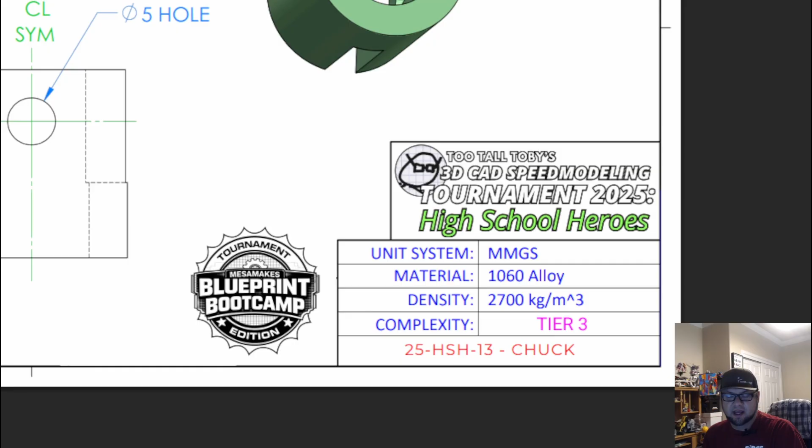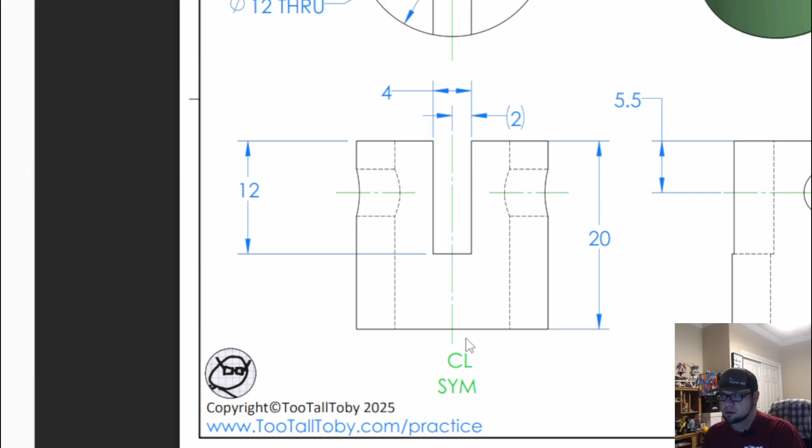you'll see that we kind of have an overall top shape of a circle. So we'll have a 20 millimeter diameter with a 12 millimeter through hole, all symmetrical. And then if we come down over here, there we go. You'll see we have overall depth of 20 millimeters with a 4 millimeter slot that goes down 12 millimeters, and I'll show you how to do that.

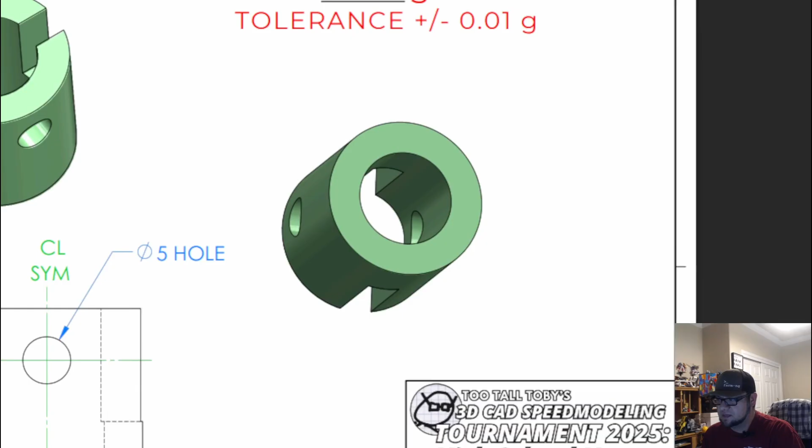Come on over here to our hole on the side. It's going to be 5.5 millimeters down, centered on that middle, and we're going to have a 5 millimeter hole. And we need to find out overall what our mass is in grams, with a tolerance of plus or minus 0.01 grams. So we're getting a little tighter on those tolerances, but overall a pretty darn good part to try out. So let's go ahead and jump on into Onshape and we will get started.

All right, once we are in Onshape, again, first thing we need to do is change our units. So we're going to go from workspace units up here, from inches to millimeters, and pounds to grams. Now, if you already draw in millimeters as your default, you do not have to do this step. So first thing we're going to do, we're going to click our top plane, Shift and S to start that sketch, N to normalize. And I like hiding those planes by pressing P.

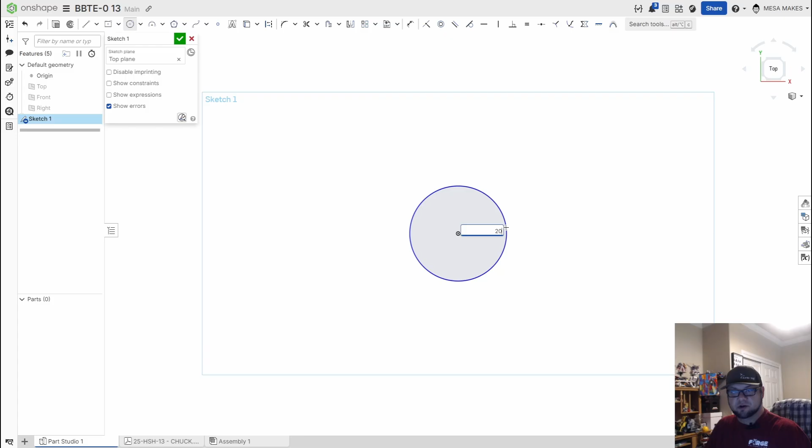Next step, I'm going to draw a circle. That outer circle needs to be 20. And if you've zoomed out too far, a cool trick, you could press F on your keyboard and that'll fit everything to your screen. So without letting go of the circle, I'm going to draw another one. Remember, we're doing this for speed, and that one needs to be a 12 millimeter circle.

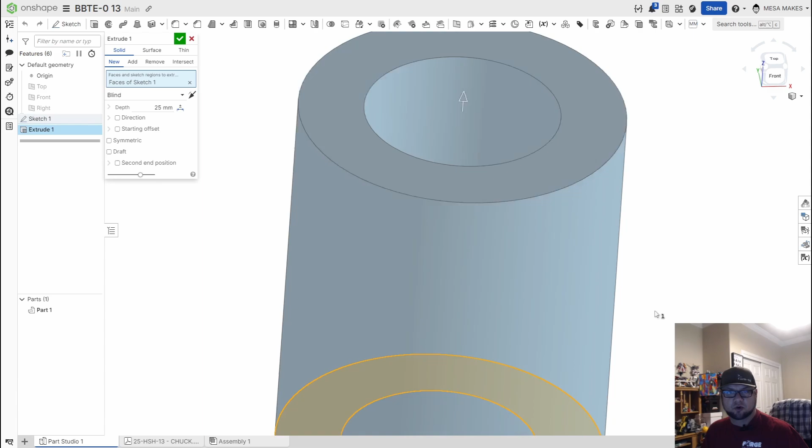I'm going to extrude, Shift and E that whole part. And this time I'm going to tell this to be 20 instead of 25. Go ahead and press enter a few times to bring that guy to 3D. Next thing I'm going to do is turn my planes back on, but I think I'm going to start with my hole.

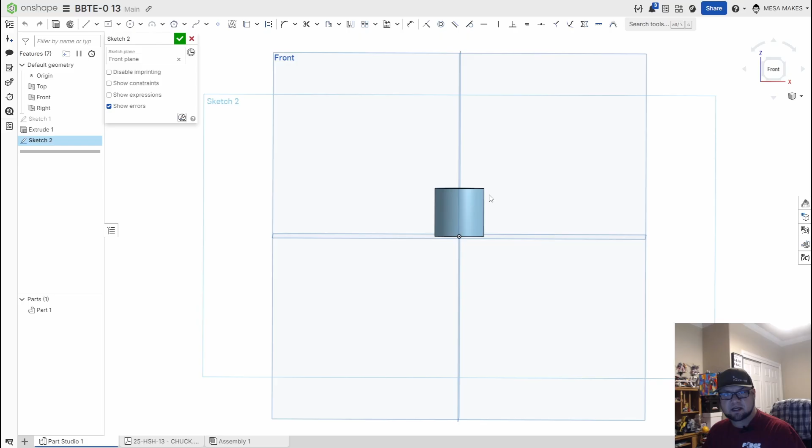So I'm going to choose the front plane, Shift and S, and I'm going to draw a circle. So we'll go ahead and track from that origin right down the center. I'm going to say this needs to be 5, and I'm going to select D for dimension, select my center point and my top, and that needs to be 5.5 away from the top.

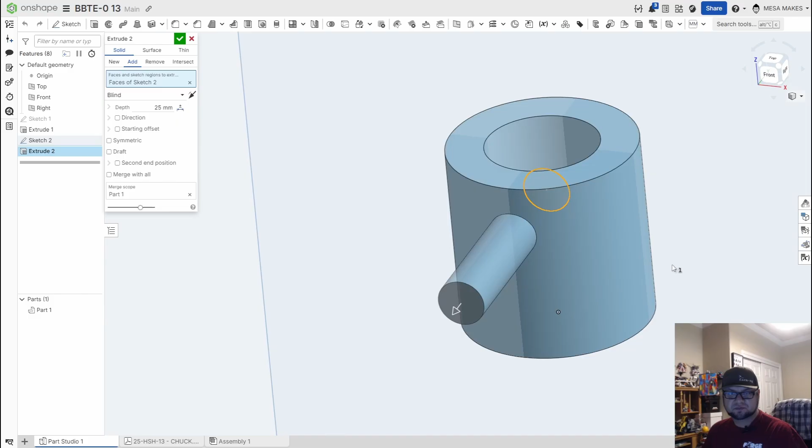At this point, I would press Shift and E, and if we come over the top, you'll see it's trying to add that. So what we can do here is click remove, and you'll see now it's going to be cutting a hole through, but we want it to go both directions.

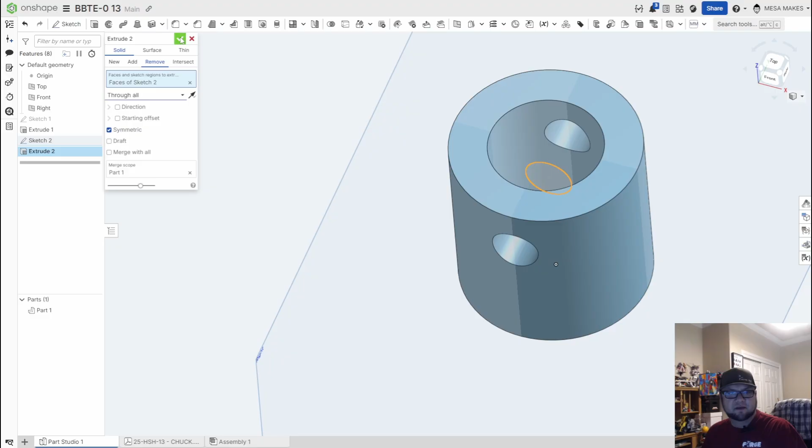So we'll say symmetric, and that's a good place to stop right there. I can just leave it as is, but if I were to end up making this bigger in the future, I always want that hole to go through everything. So I'm going to future-proof this drawing and make that through all. If you're in the tournament doing stuff, you probably don't want to do that because it's going to waste some time. But now we have our hole that goes through everything, through all hole.

Next, I'm going to draw my slot. Now, some of you guys might want to draw it from the side like this, and that's okay, but I like doing it from the top. It's a little bit easier, a little less dimensions you have to do.

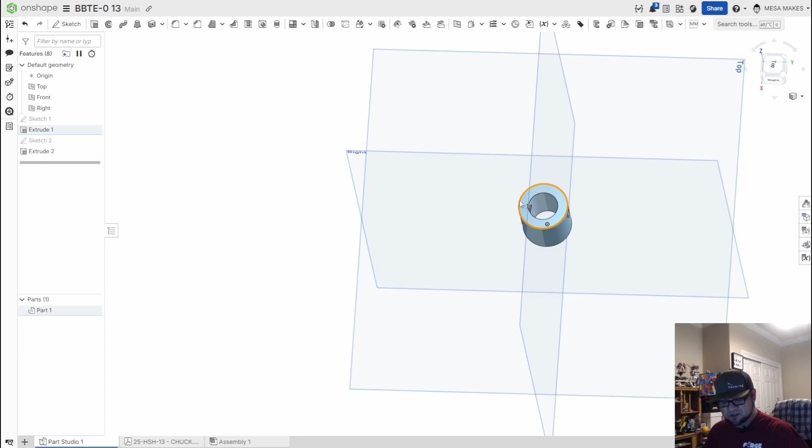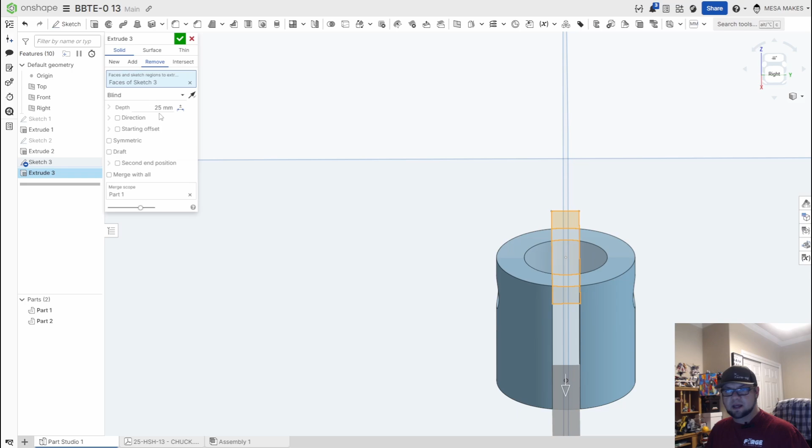So Shift S on that top face. I'm going to click right here, and I'm going to do a center point rectangle by pressing the letter R. I'm going to go here, and I don't care how long it is, as long as it's bigger. Then I'm going to tell this one that it needs to be 4 wide, and because it's centered, I can then say Shift E again, remove, this time not through all, and we want that to only go down 12 millimeters, and we'll say okay. There is our finalized chuck part.

Last thing I need to do is right click, assign material, TTT custom materials, and this time we are going to be that 1060 aluminum. We'll say okay.

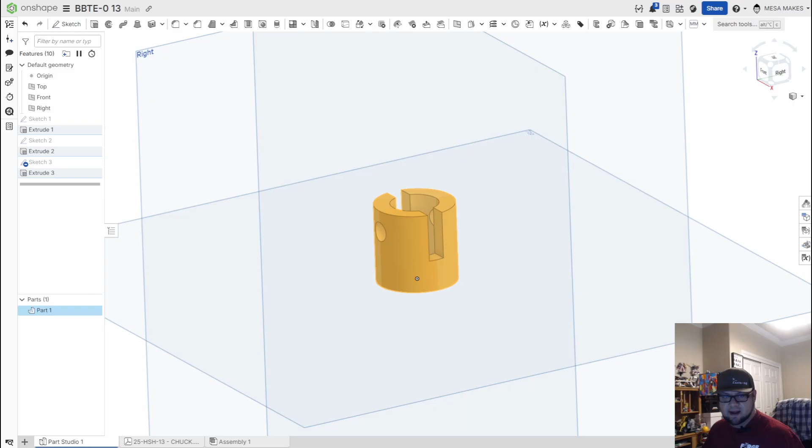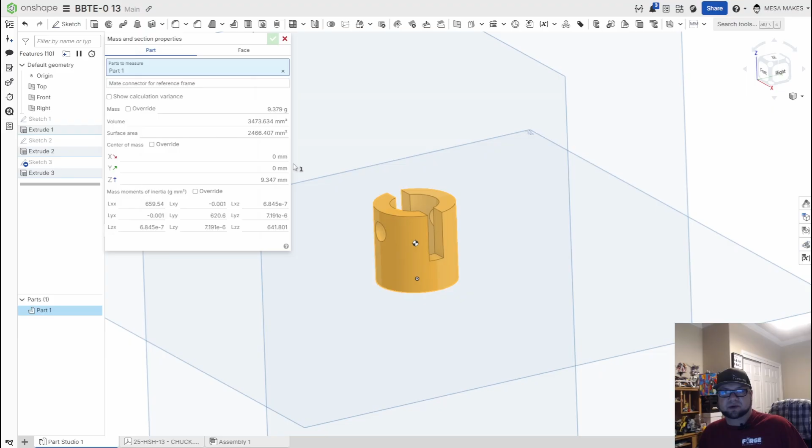And now I check my mass, and my mass is 9.379. So we'll round that up to 9.38. You can have a tolerance of plus or minus 0.01, so you can have as low as 9.37 and as high as 9.39 to be an acceptable answer. So my answer was 9.379, which is 9.38. So anywhere from 9.37 to 9.39 falls within that range, and that's going to do it for us.

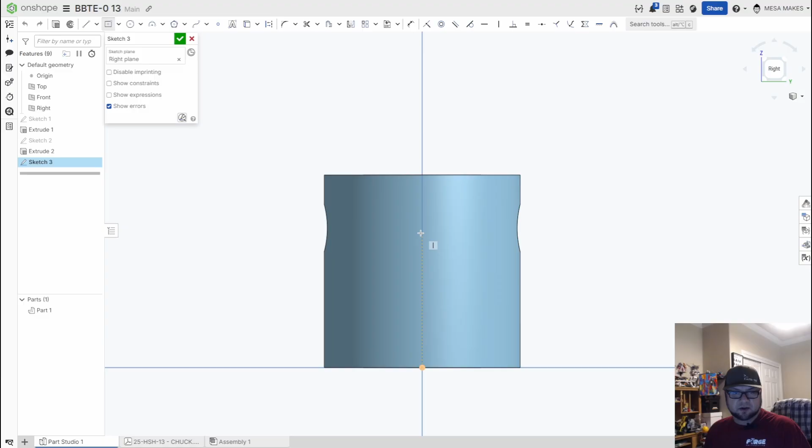So I want to go back a step though. I told you guys we could do it to here, so I'm going to delete these two sketches, and I want to show you how you would draw this from the side. So we'll do a Shift S sketch on this right, and we're still going to do it, but this is kind of how I would do a center rectangle. So I would come up here, and then I actually do this, and what I tell it is this needs to be 12, and then I take that point in there and I say coincident, and then I tell this the measurement that it needs to be 4.

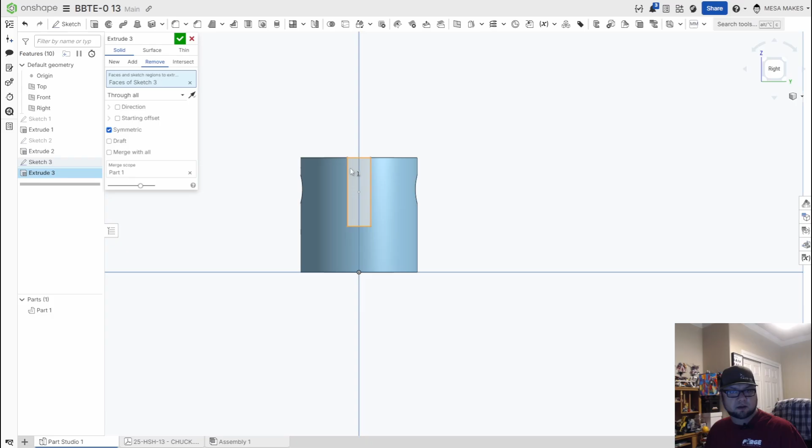Then I can extrude, remove through all, like such. So you end up with the same exact geometry. Again, I'll show you, if we do mass properties, I still end up with 9379. So it's the same exact idea, but it's however you want to go about drawing it.

So that's going to do it for us today. Hopefully you guys are learning some stuff through this. I know some of you guys are trying out some CAD practice stuff, and you're getting better at that, but I just want to go back and give you guys some more practice on these old Blueprint Bootcamp, our old high school heroes tournament.

So if you have any questions on how to get some stuff done, I know I want to start doing some stuff on 3D printing. I think I'm going to do a couple more in this series, and then we will jump into that type of setting. So I'm working on trying to get some more 3D printers, and also to get some more 3D printing content out to you guys.